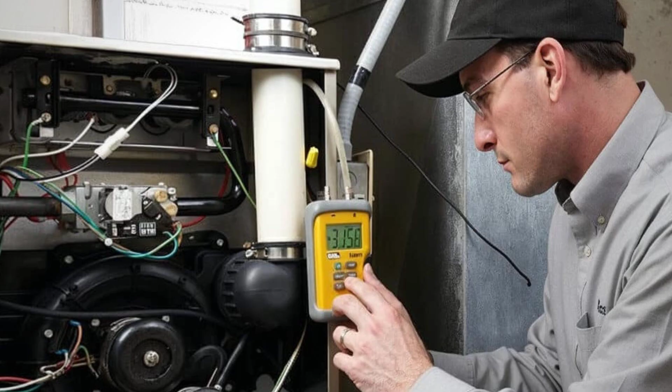Now let me show you what I found. The American heating industry generates $130 billion in annual revenue. That number requires your participation to exist. It requires that your home have a furnace, a boiler, a heat pump, or some other mechanical system that burns fuel or consumes electricity, and that needs to be serviced, repaired, and eventually replaced.

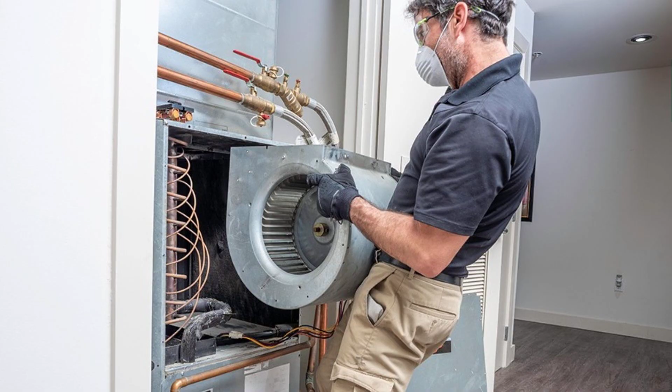The average American household spends $2,200 a year on heating and cooling. Over the 40-year lifespan of a typical home, that is $88,000 in energy costs alone, not counting the $7,000 to $15,000 installation cost of the HVAC system, not counting the replacement unit at year 15 to 20, not counting the service contracts and filter replacements and refrigerant recharges that keep the industry's secondary revenue stream flowing between major purchases.

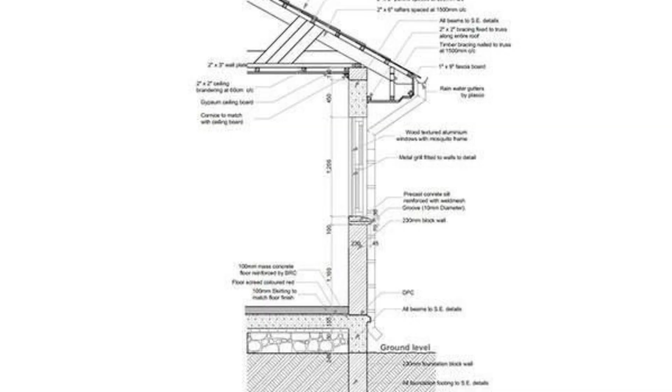A home that heats itself requires none of that. And the people who built homes that heated themselves in the American Southwest, the Great Plains, the Subarctic, and the Pacific Northwest for thousands of years before any of those industries existed, were doing it with 3 materials: earth, stone, and the sun. The same sun that rises every morning over every home in this country, including yours. Let me take you through the complete system, layer by layer, the way it was built, and the way the physics explain why it works.

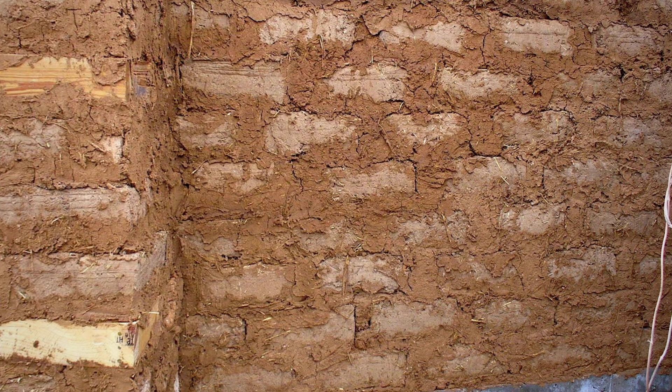The first layer is thermal mass. I covered this in detail in a previous video on adobe construction, but the principle here goes further. The ancestral Pueblo builders of Chaco Canyon, whose structures are among the most studied architectural achievements in North American archaeology, built walls with an average thickness of 36 inches, not because they lacked the sophistication to build thinner walls, because they understood, through centuries of observation and refinement, that wall thickness is thermal storage capacity. Every additional inch of wall mass is additional hours of heat retention.

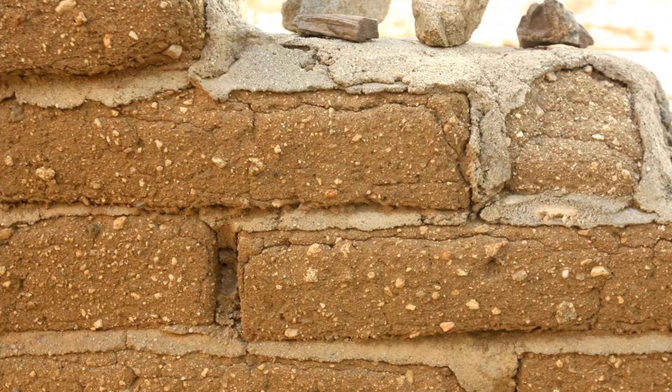A 36-inch wall does not just slow the passage of heat, it stores enough thermal energy from a single day of sun exposure to heat the interior space for 18 to 24 hours of cold night air. The structure runs on stored solar energy with a lag time that perfectly aligns the release cycle with the demand cycle. Heat when you need it. From walls that have been charging themselves since sunrise.

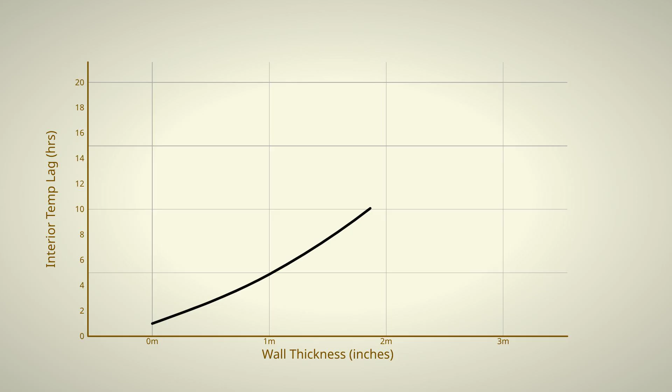Modern building science has a term for this. It is called the thermal flywheel effect. The heavier the thermal mass, the more slowly the interior temperature responds to exterior temperature changes. A well-designed thermal mass structure in Albuquerque experiences interior temperature fluctuations of 5 to 8 degrees over a 24-hour cycle during winter, while the exterior temperature swings by 35 to 40 degrees across the same period.

That stability is worth more in human comfort terms than any thermostat ever manufactured, and it is produced by physics, not machinery. A 2020 study from the Passive House Institute measured heating energy demand across 12 building typologies in the American Southwest. Traditional adobe construction required the least supplemental heating of any structure in the study, including modern Passive House certified designs, built with advanced insulation systems and triple-pane glazing. The 1,000-year-old technology outperformed the cutting-edge modern technology.

The paper noted that the performance advantage was most pronounced during the extended cold snaps that characterize high-altitude desert winters, exactly the conditions where a mechanical heating system's capacity limits are most likely to be exceeded. The second layer is earth berming. Several traditional Pueblo structures, and virtually all traditional earth lodge designs from the Great Plains, were built into or against the earth rather than sitting on top of it.

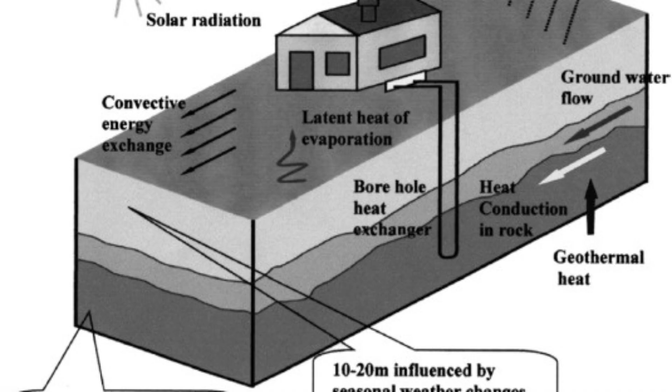The ground at a depth of 6 feet maintains a temperature of approximately 55 degrees Fahrenheit year-round across most of the continental United States. That is a physical constant produced by the thermal mass of the earth itself and the insulating effect of the soil above it. A wall that backs against an earthen berm or a structure partially buried in a hillside has one or more exterior wall faces that never drop below 55 degrees regardless of the air temperature outside. You are not fighting a -10-degree wall. You are fighting a 55-degree wall. The energy required to maintain interior comfort is a fraction of what an exposed above-grade structure demands.

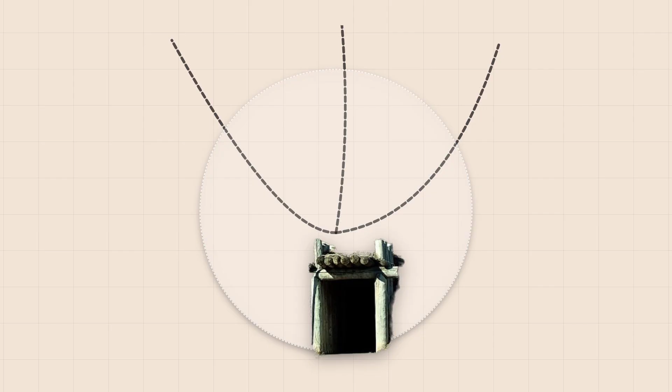The Mandan Earth Lodge of the Great Plains is the most well-documented example of this principle in North American indigenous architecture. A circular structure, partially subterranean, with walls of packed earth and a roof of layered timber, brush, and sod. The Earth Lodge maintained interior temperatures that Lewis and Clark, who spent the winter of 1804 with the Mandan at Fort Mandan, in what is now North Dakota, described in their journals as remarkably comfortable despite exterior temperatures that dropped to -40 degrees Fahrenheit.

-40 outside, comfortable inside, with no furnace, no fuel beyond a small central fire that burned for cooking, not heating. Lewis wrote specifically that the lodges were warmer than any structure the expedition had built, and that the Mandan appeared entirely unbothered by conditions that were pushing the American soldiers to the edge of their physical tolerance. The Earth Lodge walls were doing the work that a modern forced air system would struggle to keep up with at those temperatures, without consuming a single cord of wood beyond what the cooking fire required.

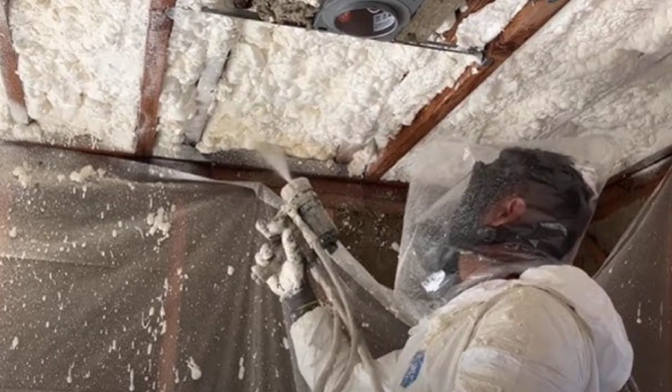A structural engineer at the University of North Dakota published a thermal analysis of reconstructed Earth Lodge geometry in 2014. The study found that the partially subterranean design, combined with the sod roof and packed earth walls, produced an effective thermal resistance equivalent to R40, which exceeds the insulation requirement for new residential construction in every climate zone in the United States today. R40, from packed earth, timber, brush, and sod, at zero material cost to anyone living near those materials, which in 1804 North Dakota was everyone.

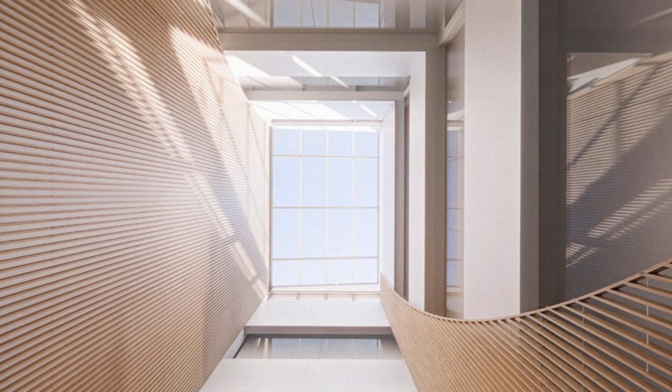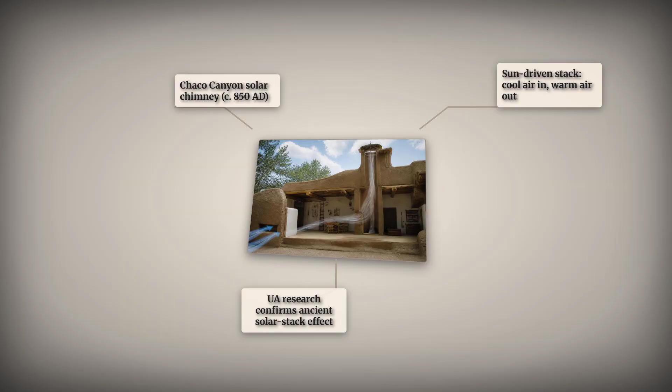The third layer is the solar chimney. This is the piece that most people have never heard of, the piece that the building code language most directly targets, and the piece that elevates the system from impressive to extraordinary. A solar chimney is a vertical shaft, dark-colored on the exterior, south-facing or exposed to maximum solar radiation that heats the air inside it through solar gain. As the air inside the shaft heats up, it rises, creating an upward draft. That draft draws cool air in through low intake vents on the shaded north side of the structure, pulls it across the living space, and exhausts the warmed air out through the top of the chimney.

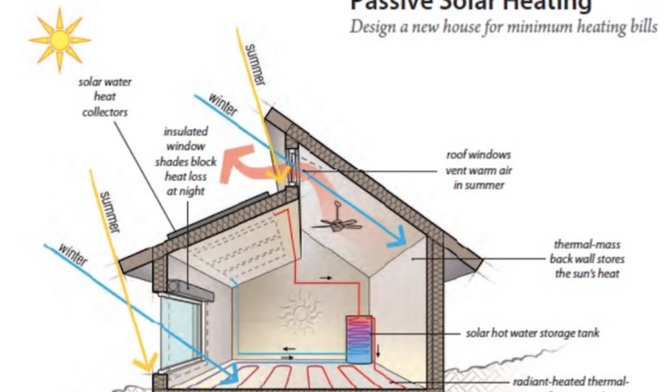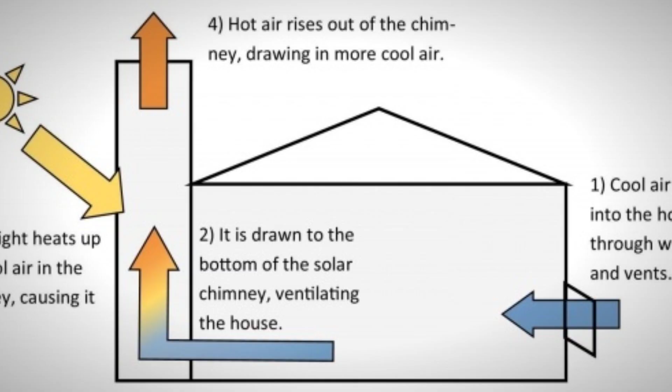On a cold but sunny day, which describes the majority of winter days across most of the American West and much of the rest of the country, the solar chimney circulates air through the living space continuously using nothing but sunlight to drive the convection. No fan, no blower, no electricity. Sunlight moves the air. The thermal mass stores the heat that the moving air distributes. The earth berm stabilizes the base temperature. The three systems compound each other. Pueblo architectural researchers at the University of Arizona studied the ventilation patterns of traditional Pueblo structures at Chaco Canyon in a 2016 paper published in the journal Solar Energy.

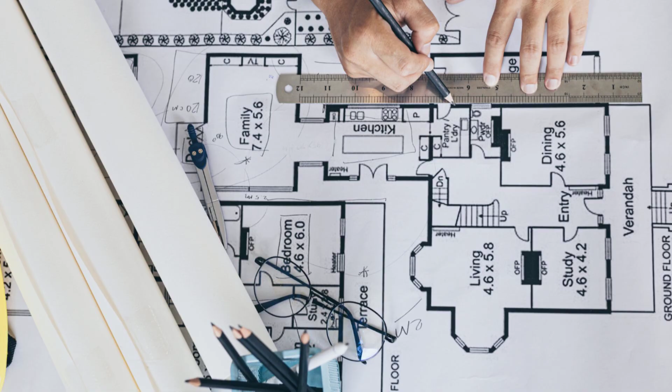They found evidence of deliberate solar chimney design in structures dating to approximately 850 AD. The shaft geometries, wall colorings, and orientation patterns were consistent with intentional solar-driven air circulation rather than accidental ventilation effects. The researchers noted that the design sophistication was comparable to modern passive solar ventilation systems specified by architects trained in contemporary sustainable building methods. Comparable to structures built in 850 AD.

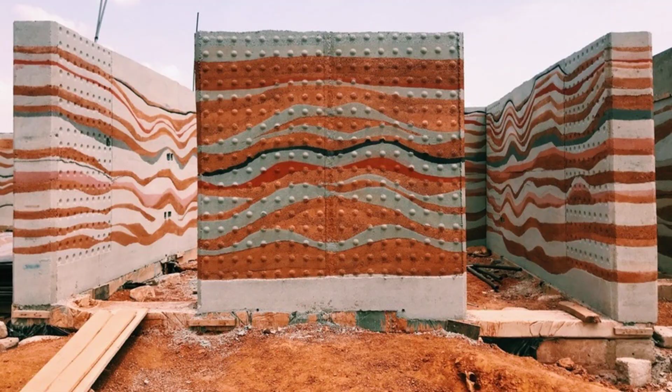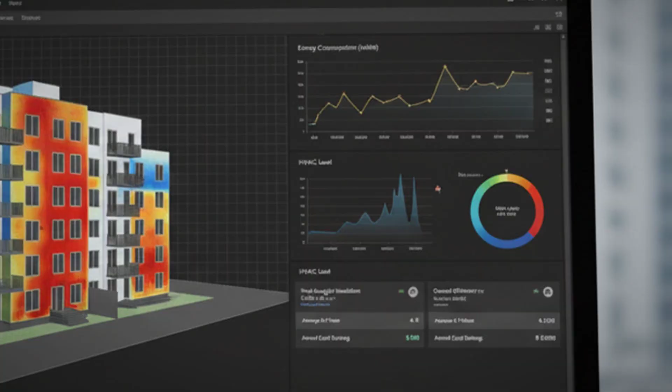Now here is where the story turns from impressive to deliberately suppressed. In 2006, a homeowner in Tucson, Arizona, named James, applied for a building permit to construct a new single-family residence, using a design that incorporated all three of these principles: rammed earth walls, partial earth berming on the north and west sides, and a solar chimney integrated into the south facade. The design was prepared by a licensed architect. The energy modeling showed the structure would require zero supplemental heating and minimal supplemental cooling.

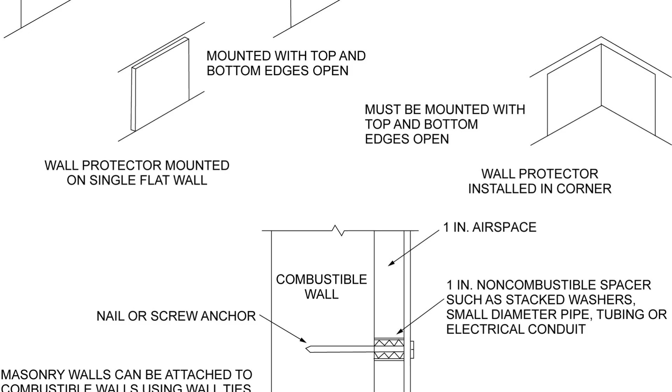James submitted the permit application and waited. The Tucson Building Department rejected it, not for structural reasons, not for safety reasons. The rejection cited non-compliance with Section M1401 of the International Residential Code, the section that requires every habitable space in a new residential structure to be served by a heating system capable of maintaining a minimum temperature of 68 degrees Fahrenheit under design conditions. The solar chimney and thermal mass system was not considered a compliant heating system under the code because it had no thermostat, no rated BTU output, and no licensed mechanical contractor of record.

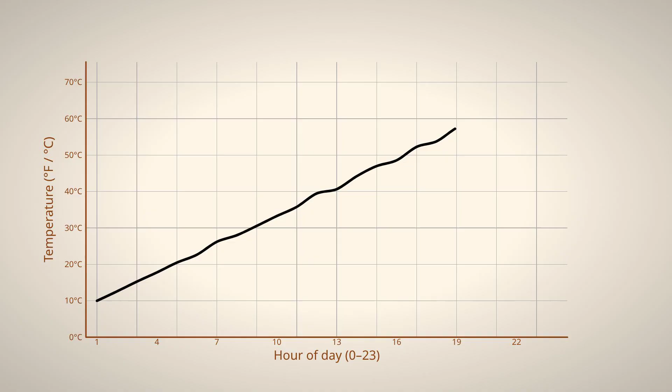James appealed. During the appeals process, his architect submitted the energy modeling showing the structure would maintain 68 degrees or above under the 99th percentile cold design conditions for Tucson. The board acknowledged the modeling. They upheld the rejection anyway. The code required a mechanical system. A passive system, regardless of performance, did not qualify.

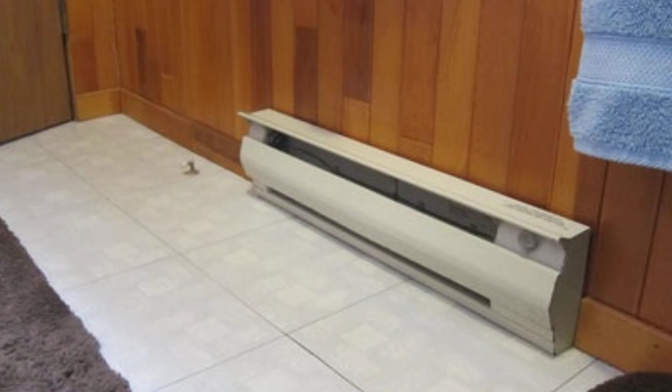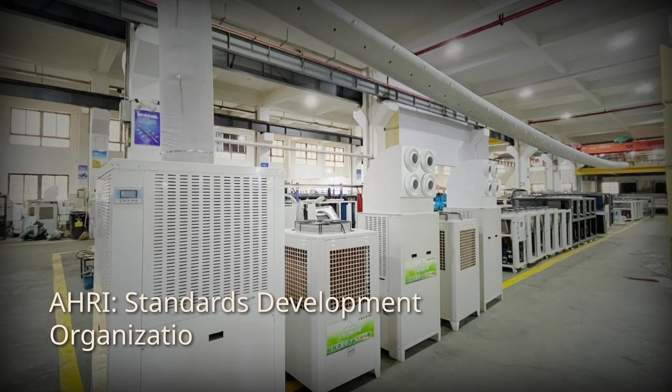James installed a $400 electric baseboard heater in each room to satisfy the code requirement. The heaters have never been turned on. His energy bills for heating and cooling combined average $18 a month. The solar chimney, the rammed earth walls, and the earth berming do what they were designed to do. The baseboard heaters sit there satisfying a code requirement written by a process that the Air Conditioning, Heating, and Refrigeration Institute, AHRI, participates in as a standards development organization.

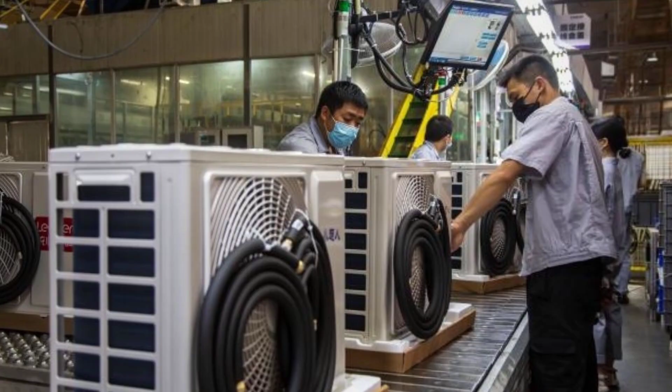AHRI is the trade association that represents the manufacturers of heating and cooling equipment. It has formal participation status in the International Code Council's code development process, the process that produces the International Residential Code that governs residential construction in most of the United States. AHRI members include Carrier, Trane, Lennox, and Rheem. The combined annual revenue of those four companies exceeds $40 billion. They sit at the table where the rules are written. The rules they help write require mechanical heating systems in every new home. The mechanical heating systems they manufacture are what those rules require.

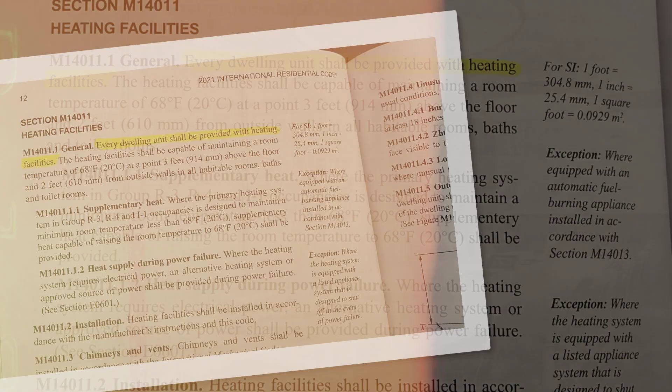This is documented public record. The ICC publishes its Code Development Committee memberships. AHRI's participation is listed. The conflict of interest is not hidden. It is just not discussed in any conversation the industry controls. It is worth being specific about what the code language actually does, because this is the mechanism that turned Rose's working house into a code violation.

The International Residential Code section M1401.1 states that every dwelling unit shall be provided with heating facilities capable of maintaining a room temperature of not less than 68 degrees Fahrenheit at a point 3 feet above the floor and 2 feet from exterior walls. The keyword is facilities. Defined in the code commentary as a mechanical system with a rated heating capacity expressed in BTU per hour, served by a licensed mechanical contractor and equipped with thermostatic controls.

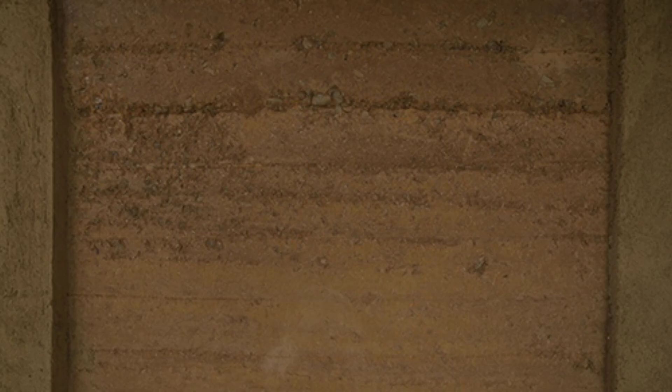A passive thermal mass wall has no rated BTU output. A solar chimney has no thermostat. An earth berm has no licensed contractor of record. None of the three systems that have been keeping people alive in North Dakota winters since before written history qualifies as heating facilities. Under the current code, the performance is irrelevant. The definition is everything, and the definition was written by people who sell furnaces.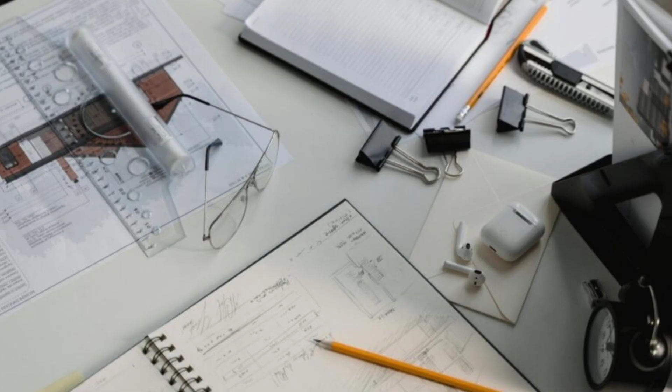The code has been updated numerous times since 2006. Each update has maintained the mechanical system requirement. Several states have adopted modified versions that create pathways for passive heating compliance, but those pathways require additional documentation, third-party energy modeling, and in most cases, a licensed mechanical engineer's certification that the passive system meets the performance threshold. The barrier is not absolute. It is expensive and time-consuming enough to deter most individual homeowners. The industry does not need to ban the technology. It just needs to make it harder than buying a furnace.

Now let me show you what you can actually do with this practically, within the constraints that exist. The most accessible application of this complete system for most people is not new construction. It is a room-level retrofit that incorporates thermal mass and passive solar principles into an existing space and reduces or eliminates the heating load for that room. I described the thermal mass interior panel in the previous video. Here I want to add the solar component.

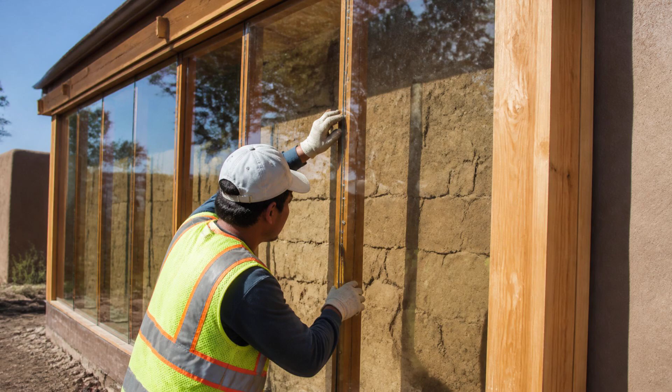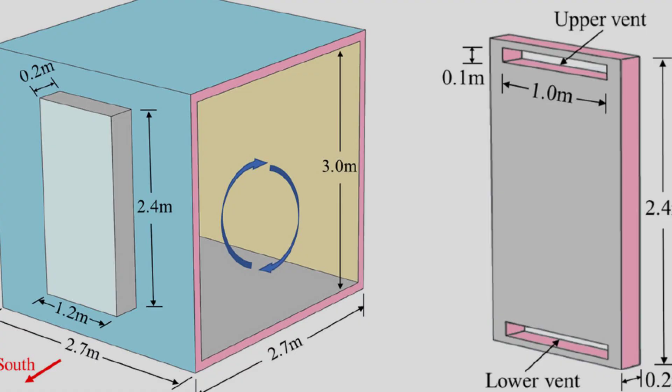A Trombe wall is the modern engineering name for a system the Pueblo builders were using before anyone named it. It is a thermal mass wall positioned directly behind a south-facing glazed surface with a small air gap between the glass and the mass wall. Sunlight passes through the glass and strikes the dark-colored mass wall, which absorbs it and heats rapidly. The air in the gap between the glass and the wall heats through convection. Vents at the top and bottom of the mass wall allow that heated air to circulate into the living space, while cooler room air is drawn into the gap at the bottom to be heated in turn.

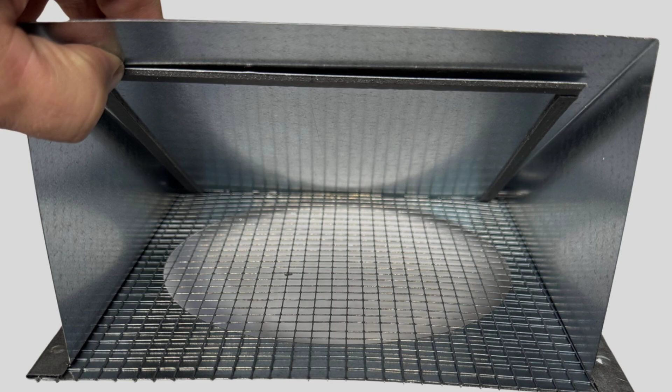At night, dampers on the vents close, preventing reverse convection from pulling warm room air back into the now cooling gap. The system runs continuously during daylight hours on sunshine alone, requires no electricity, no fuel, no moving parts beyond the damper, and delivers measurable heat into the living space as long as the sun is above the horizon.

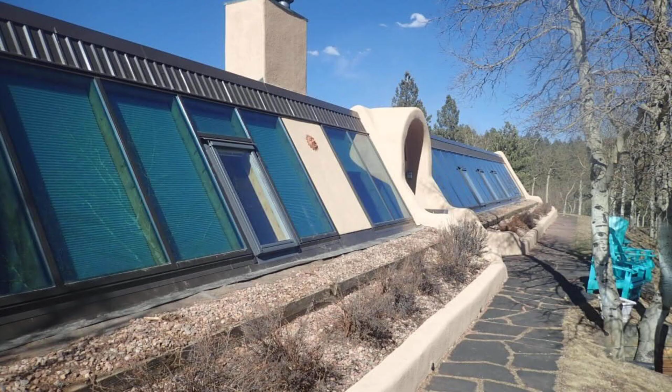A single Trombe wall panel, 8 feet tall by 4 feet wide, in a south-facing wall of an existing home, can provide between 20 and 30% of the heating requirement for the room it serves on a clear winter day, according to a 2019 analysis from the National Renewable Energy Laboratory. On a sequence of clear days, which is the norm rather than the exception across most of the American West and the Sunbelt states, the cumulative thermal contribution of the Trombe wall plus the interior thermal mass reduces supplemental heating demand to near zero for that space.

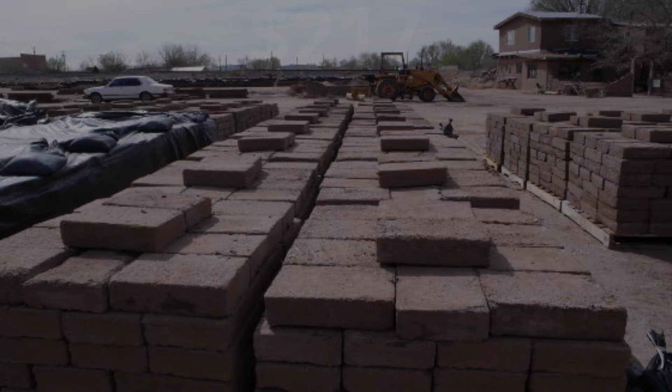Material cost for the glazing and the thermal mass backing is between $200 and $500 depending on your glazing choice, and whether you use purchased brick or site-made adobe. The performance is immediate and requires no maintenance, no fuel, and no utility connection. The baseboard heater stays in the corner. The inspector is satisfied. The Trombe wall does the work.

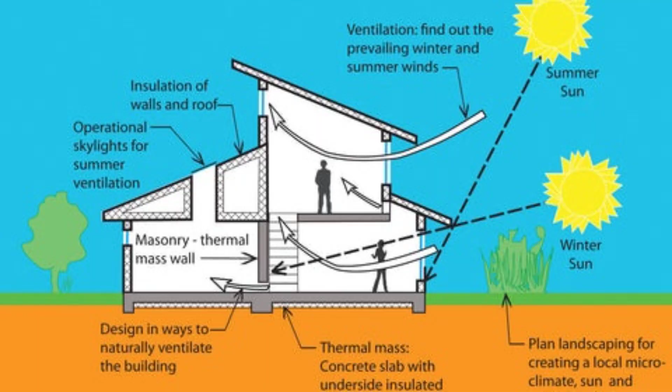Add that to the interior thermal mass panel from the previous video, and you have a room that is doing a significant fraction of its own heating from sunlight and stored thermal energy, in a structure that otherwise conforms to every applicable building code because the baseboard heater is still there in the corner, satisfying the inspector, never being turned on. That is how you work within a system that was designed to prevent you from doing exactly this. You give the system what it requires, then you build what actually works alongside it.

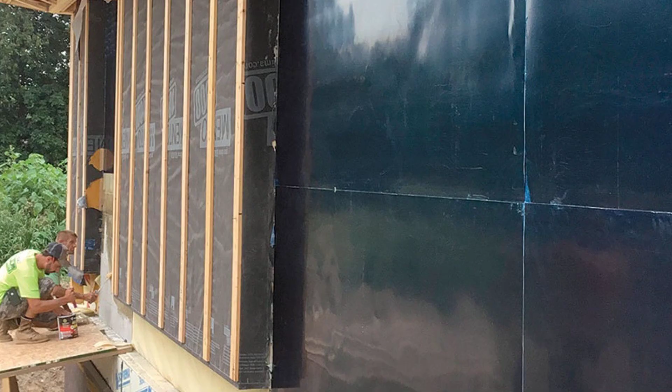The materials for a complete room-level passive solar thermal mass retrofit, Trombe wall panel, interior thermal mass wall, and south-facing window enlargement if needed, run between $800 and $2,000 depending on your room size, your glazing choices, and whether you make your own adobe brick from site soil. The ongoing operating cost is zero. The maintenance requirement is zero. The lifespan of the materials, fired clay, stone, and glass, is measured in centuries.

Rose's house in Santa Fe is still standing. I looked it up in the historic preservation records before I finished writing this. It was built in 1887, condemned in 1978, brought into code compliance with a furnace that was never used, and is now listed on the New Mexico State Register of Cultural Properties. Its walls are still 3 feet thick. The earth is still on the roof. The packed clay floor is still over stone.

And based on everything the building science literature says about structures of that construction type in that climate, it is still, right now, holding a temperature somewhere around 62 to 65 degrees in the middle of winter, without the furnace running. The building inspector who condemned it in 1978 was following a code. The code was written by a process that the people who sell furnaces participate in. Rose's house did not fail to heat people. It failed to generate revenue. Those are not the same thing.

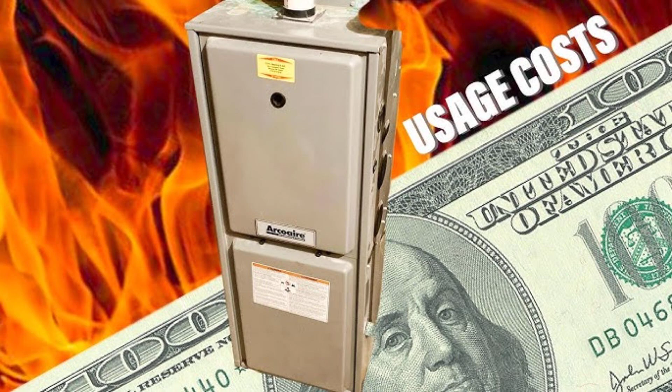They never were. And the 1,000 years of refinement that produced that house understood the difference long before anyone in the heating industry was around to blur it. You know now what the walls know. And you know why nobody with a product to sell ever wanted you to find out.